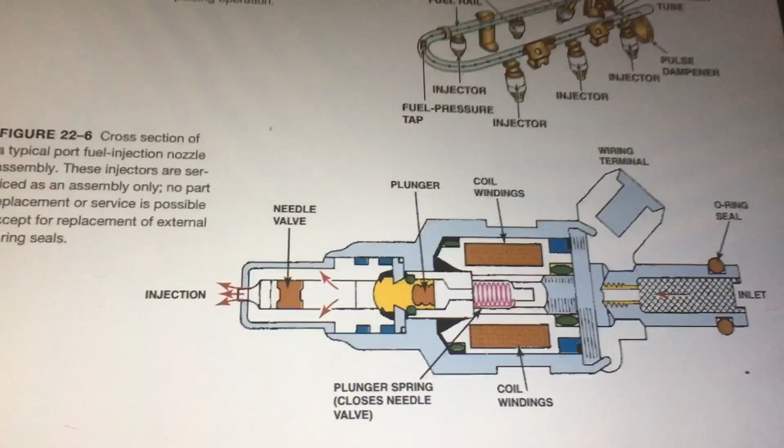I've seen a couple of videos lately on YouTube, guys, that frankly confused me when it came to their explanations of a particular system. I think maybe there's a wee bit of a misconception out there when it comes to solenoid control valves. There's a couple of different ways they can actually be utilized in the automotive realm, and in industrial design as well.

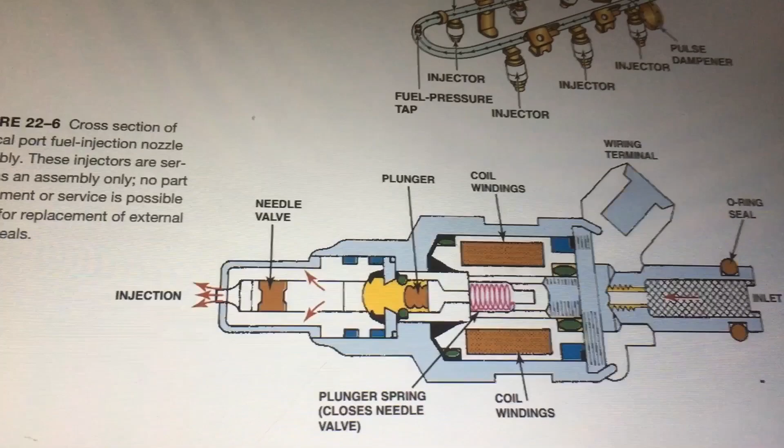But there seems to be a misconception that the analogy of a fuel injector will suffice when it comes to control valves of all sorts.

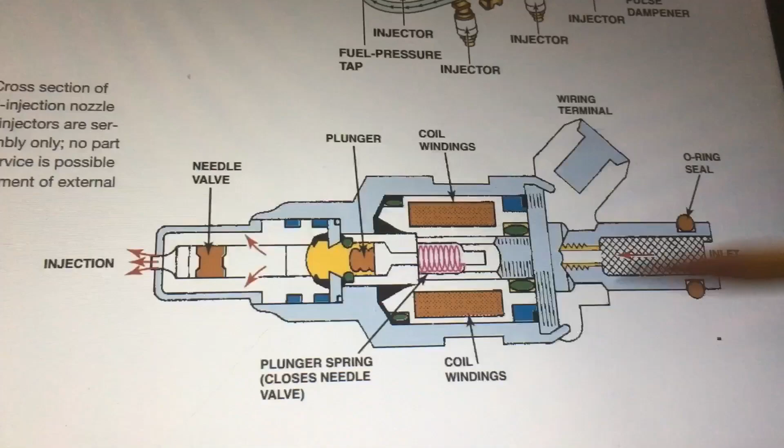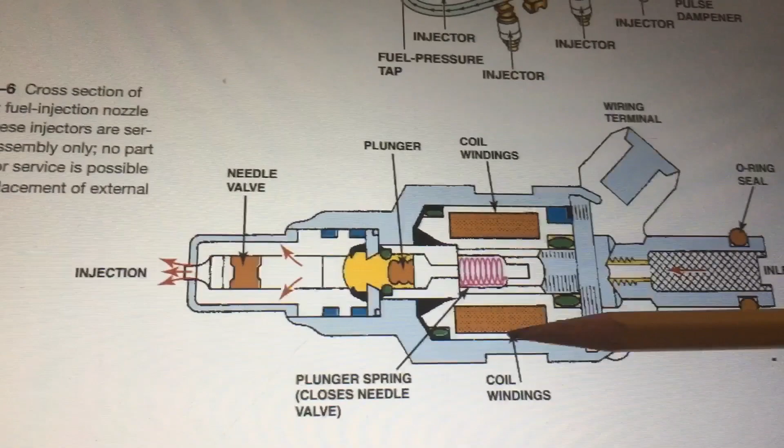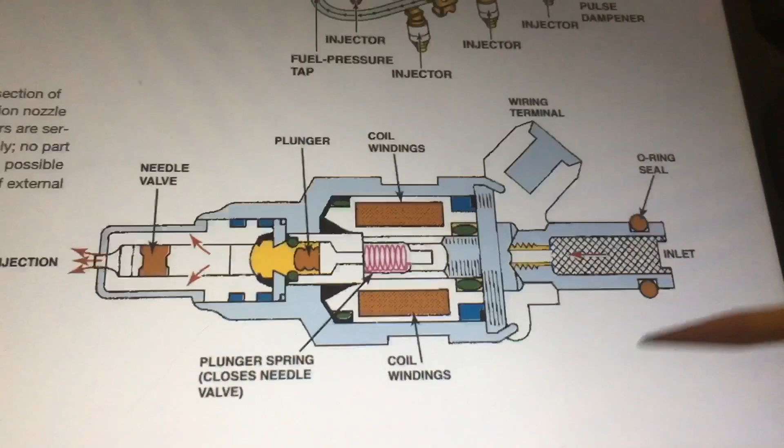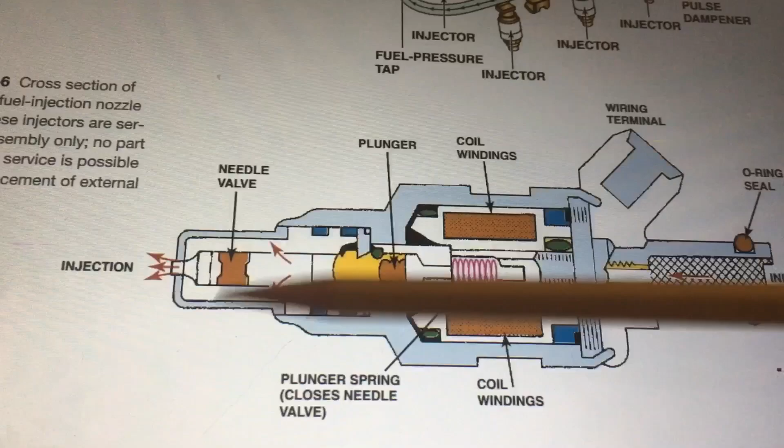A fuel injector is pretty straightforward, pretty simple. You have the body, the coil, an armature and a pintle, and as you apply current to the coil, it will lift the pintle and you'll get the stream of gasoline through the valve. Note there is an inlet and an outlet. It's essentially the pintle that lifts from the seat and allows the flow of fuel to go through.

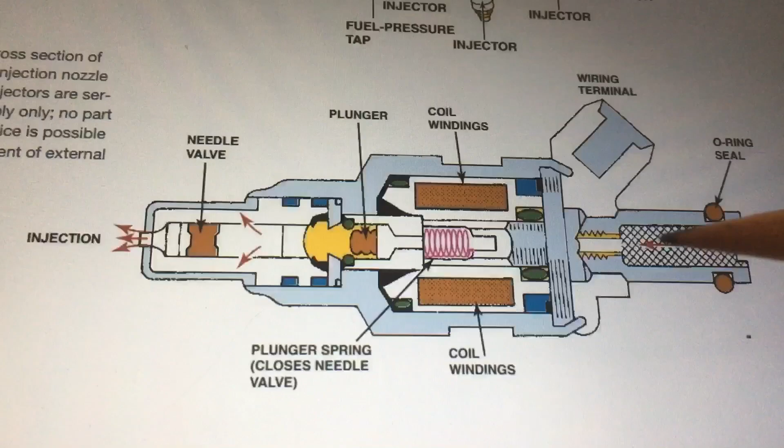So this valve will operate at the same rate as the pulse repetition frequency. Generally it's duty cycle or pulse width modulated. As the pulse comes in, it'll lift the pintle; as the pulse drops off, the pintle will drop and the fuel flow will cease. The on time is not the same as the flow—there's a wee bit of a delay because everything has inertia, but that's beyond the scope of the video. We're just making a simple distinction between the two.

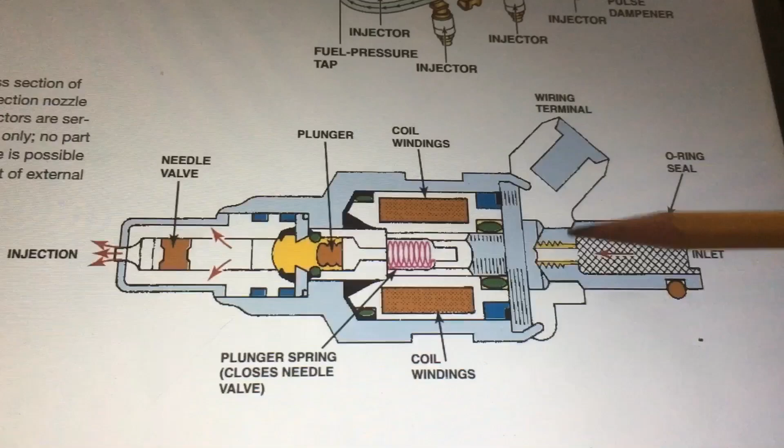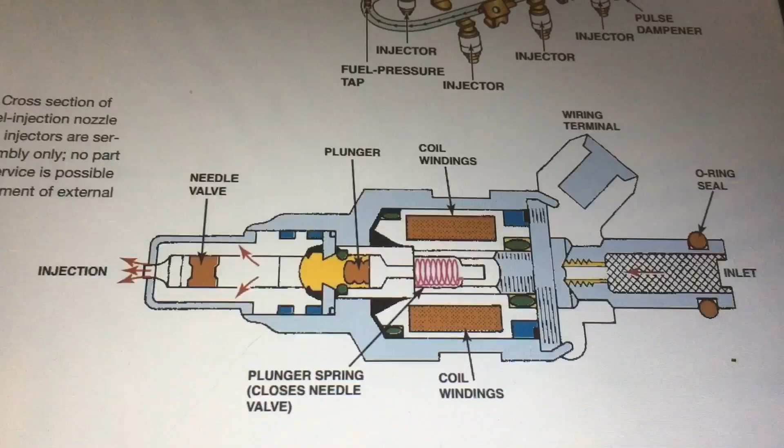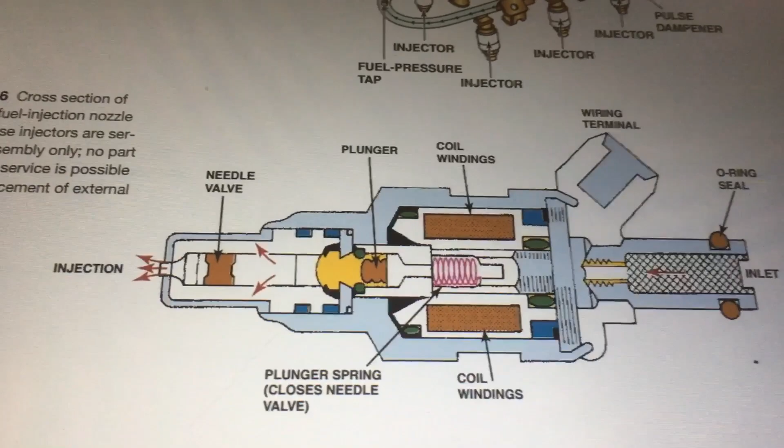So pretty straightforward: one inlet, one outlet. As the pintle lifts from the magnetic field that the coil forms when powered, fuel goes through. Simple, straightforward. But some guys seem to take this design, the internal workings of this, to the extreme to explain other things—like variable valve timing, or variable displacement compressors when it comes to air conditioning systems. It's not the same thing.

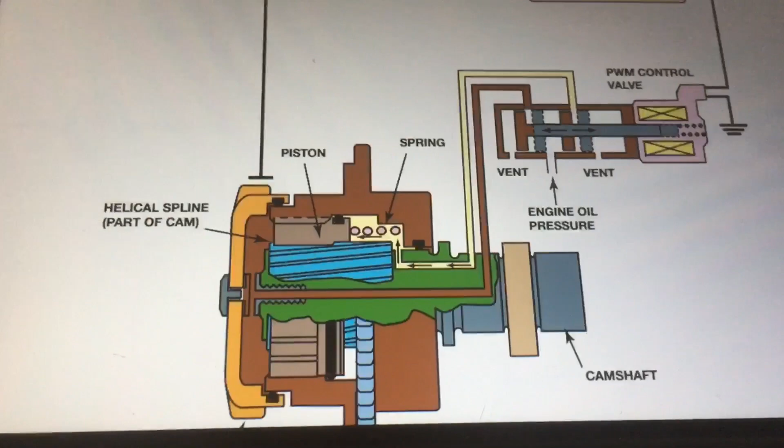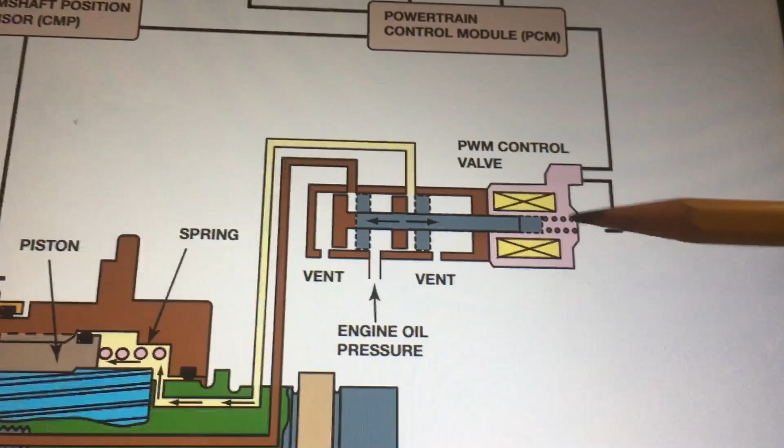Let me go to another James Halderman drawing here from his textbook. These drawings are from James Halderman's books—great books, look into them if you don't know who he is. This particular drawing gives you a cam phaser, or variable valve timing actuator, showing its workings. In simplified schematic form, here's the valve itself. You can see we still have the coil, but in this case it's actually a spool valve, not a pintle. You can see we have the oil pressure that comes in, in the case of variable valve timing.

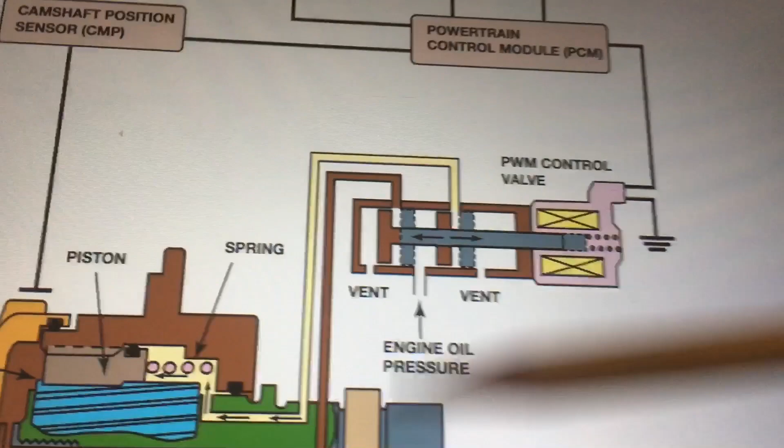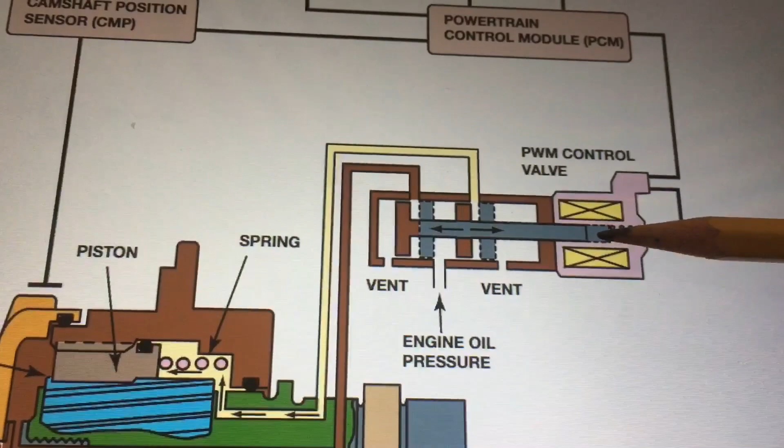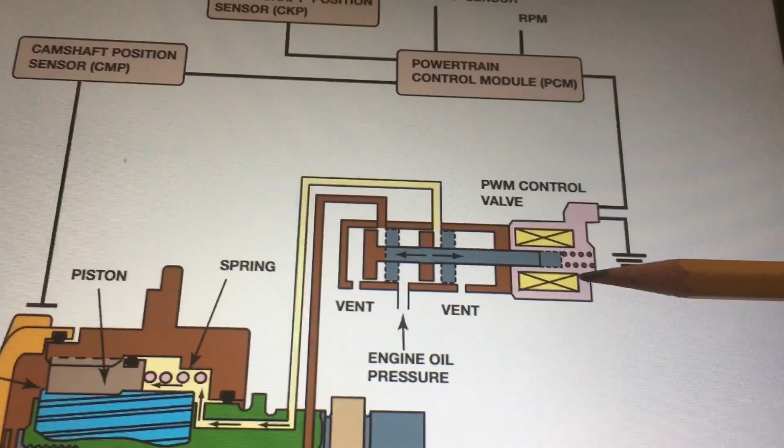It might be refrigerant pressure in the case of an AC system, but in this case it's oil pressure—we're looking at cam phasers here, variable valve timing. The major difference in this design is that it's a linear stroke; it's not just lift it and drop it. This can actually be pre-positioned, determined by the pulse width modulation, reacting to the average voltage that the PWM affords the system. It might be wound a wee bit differently, the circuit might be a bit different. It's not designed to simply lift it and drop it.

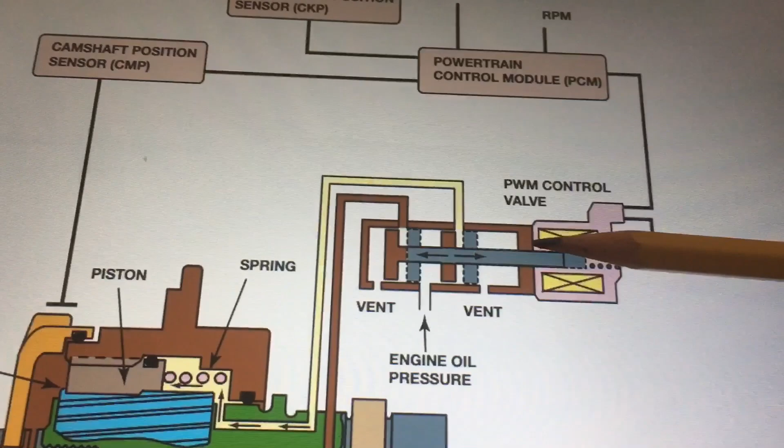It's designed to stroke it to the left and to the right in order to—my dinner's ready, sorry about that, hang on.

Very good, very good. So where were we?

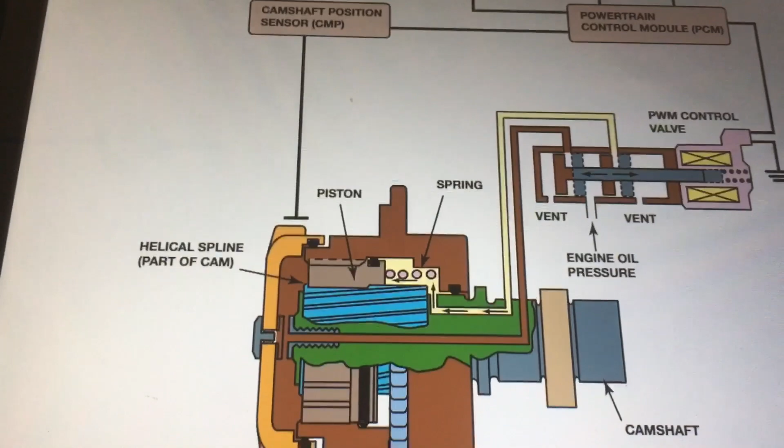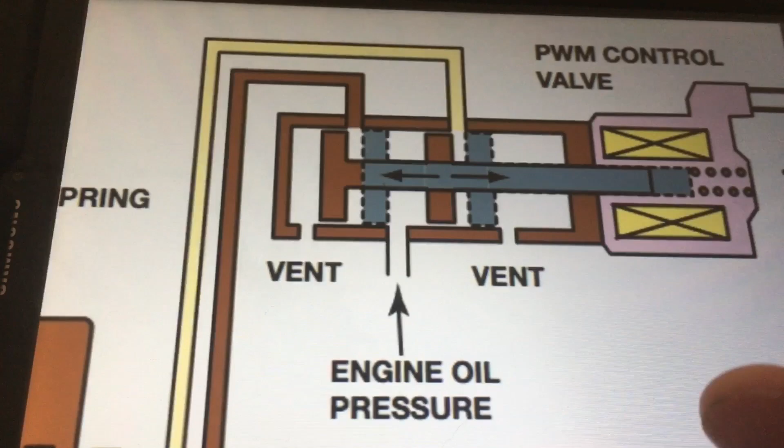The oil pressure comes in, and depending on how the pulses are applied to the coil, the average voltage would be different, allowing the spool to shuttle left or right, porting the pressure—in this case to the brown or yellow port—in order to rotate. This is a rotational actuator that rotates depending on the differential pressure and how it's applied to the ports, with facility to vent that same pressure. If you want to rotate in one direction, you're going to want to vent the pressure to the other chamber. It's kind of like a hydraulic piston—usually when you want to stroke in the other direction, you want to relieve the pressure so there's not a lock. Make sense?

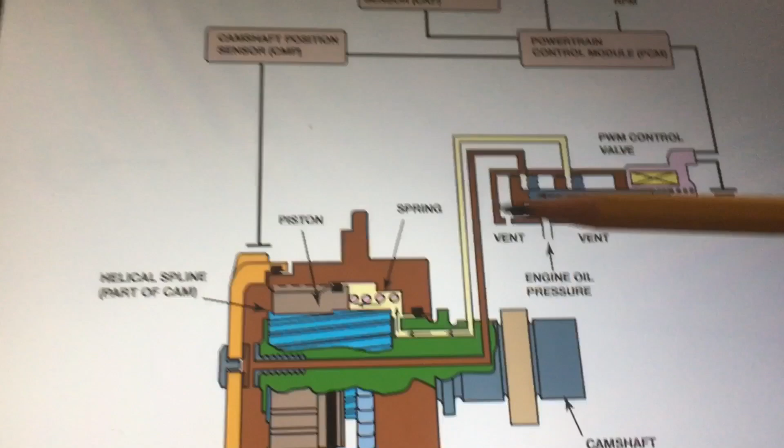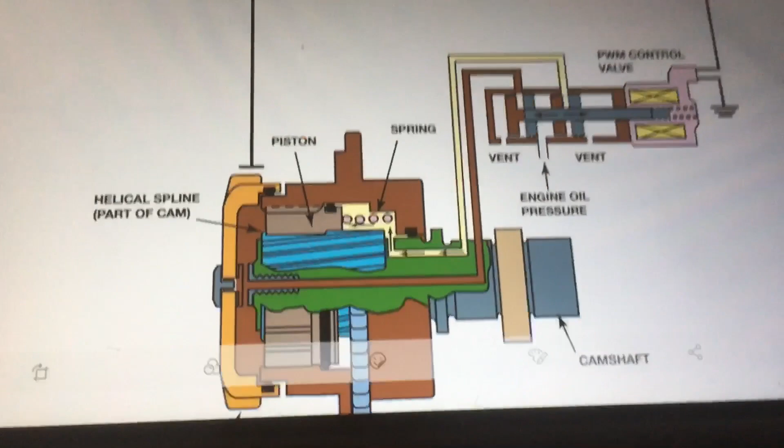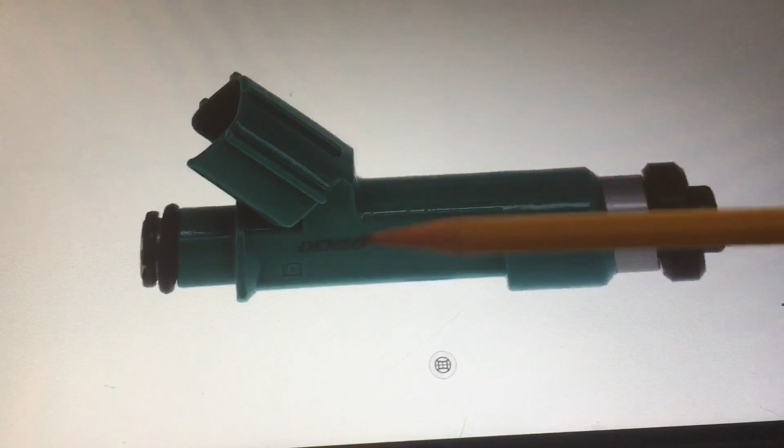So here I think is quite an obvious difference. Here's a fuel injector, with the electrical connector for the coil that forms the magnetomotive force which lifts the pintle. The inlet pressure bypasses the pintle and sprays into the combustion chamber, into the cylinder. This is just a generic drawing I pulled off the web somewhere, guys.

This is an oil control valve—or sorry, this is actually an AC valve, but it's essentially the exact same thing. You can see there are three ports shown here, different chambers. It's not just a single O-ring like a fuel injector; it's segmented into different ports, three in this case. The inlet pressure comes in—again this is refrigerant pressure in this case—and as the spool valve is shuttled left or right, the stroke of the compressor can be altered by altering this differential pressure.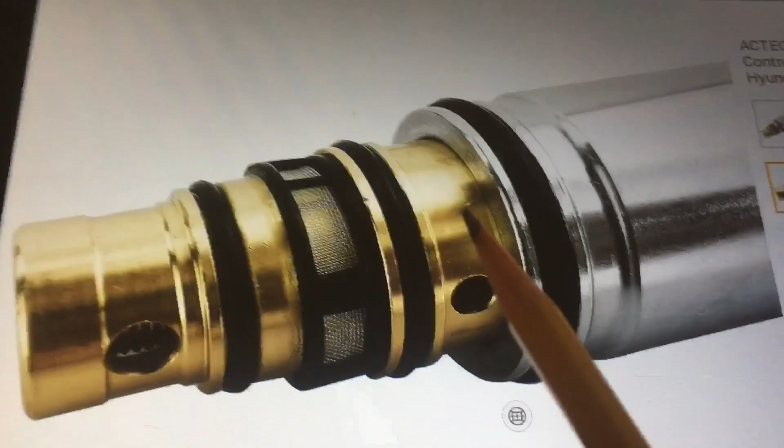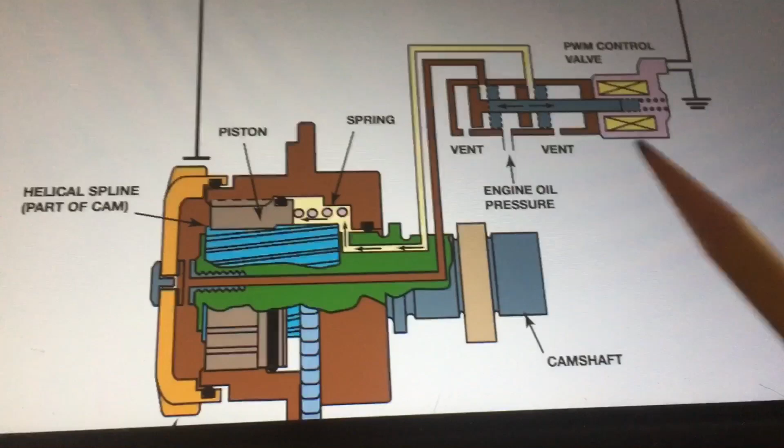Again, from James Halderman's textbooks, I hope this clearly shows you the distinction between the two. It's easy to tell because typically a spool valve will have more than one port control—this would be the inlet pressure, and then the two control ports, sometimes operating as a vent port at the same time, simply dumping it or applying pressure. This simplified version as opposed to that drawing makes it look a bit more complicated, but it's really the same thing.

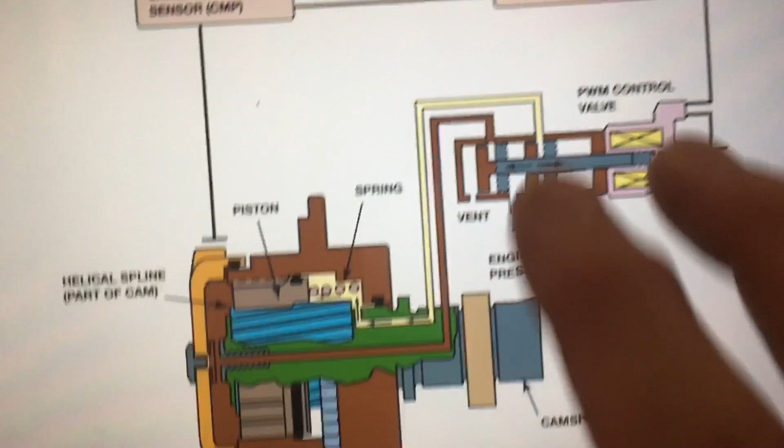Right, that's it, boys—the difference between a fuel injector and a linear stroke spool valve. That's it, boys. Cheers.